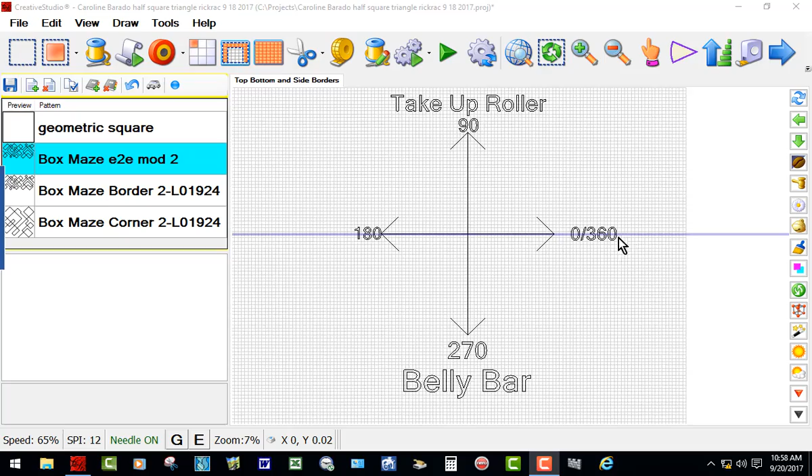Here I have a mock-up of this quilt that I'm going to be working on. This is just my picture of how everything is oriented. And I have my top border, I have my corners, and I have the corner at the bottom, the left, and the right and the left, and side borders are in, the bottom borders in. So this is just my picture of what I want to do.

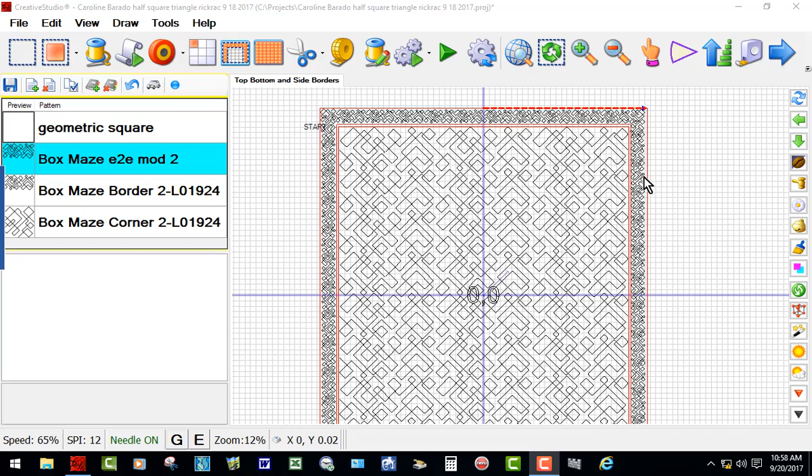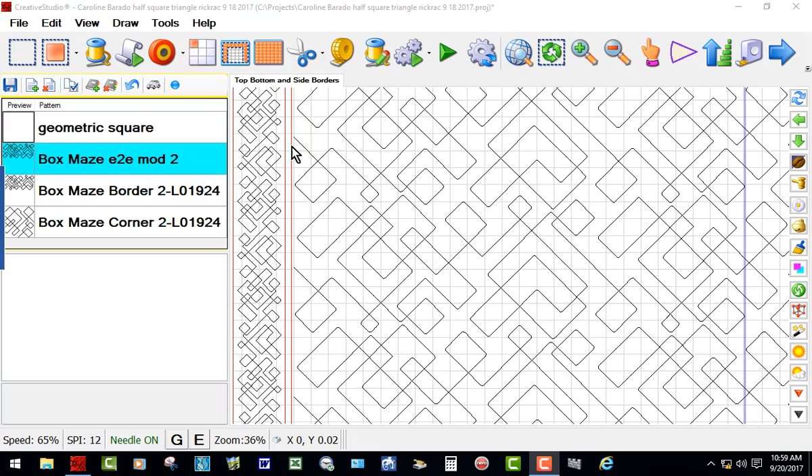And you notice that I have a boundary around the outside. Then I have this little strip. This quilt has rick-rack in this little narrow strip. So I simply put a boundary around the inner edge of the border, and then I placed another boundary around the inner edge of the rick-rack stuff. Then I put the quilt pattern I'm going to use on the interior. I have put that on the screen.

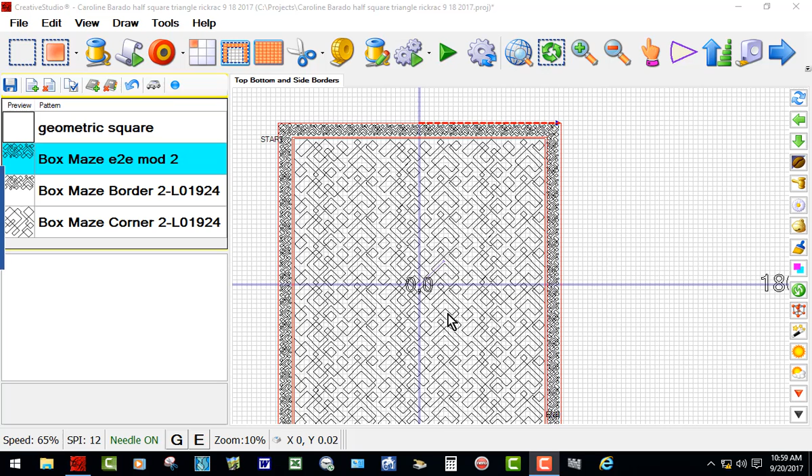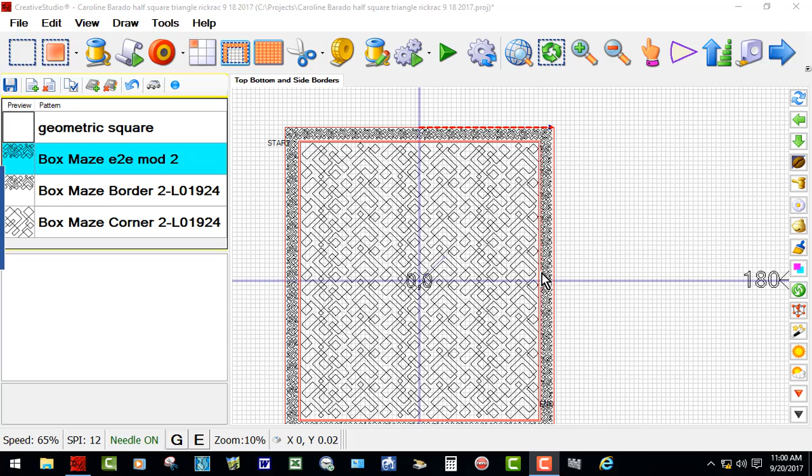Here is my origin, 0, 0. So this is how I'm going to work on setting this up. I think in the next quilt group, I'll show you how I go about orienting all of these patterns. And remember, patterns have to be properly set in place so that they connect correctly, and so that the edge that is on the outside of the boundary is going to be the same orientation all the way around the quilt.

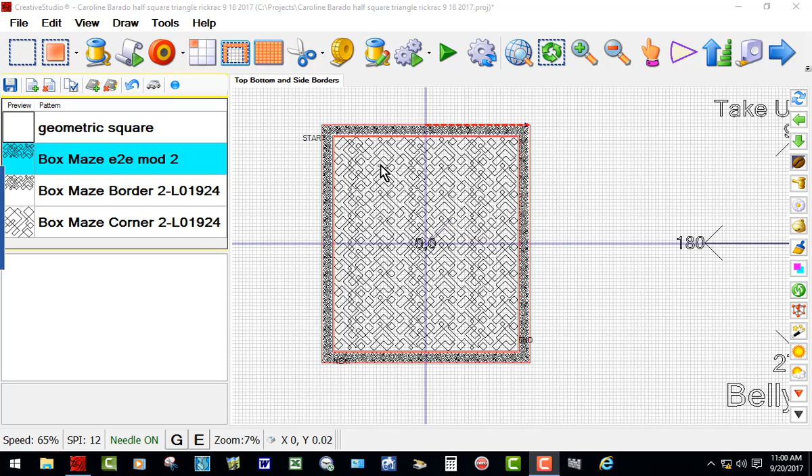The way that this is set up to quilt is left to right, then top to bottom, right to left across the bottom border, and from bottom or belly bar towards the take-up roller. I don't quilt this left side in that direction. I change it so that I can quilt it from the take-up roller down towards the belly bar, but I'll show you that as I do this. But let me show you how I can go about setting this up.

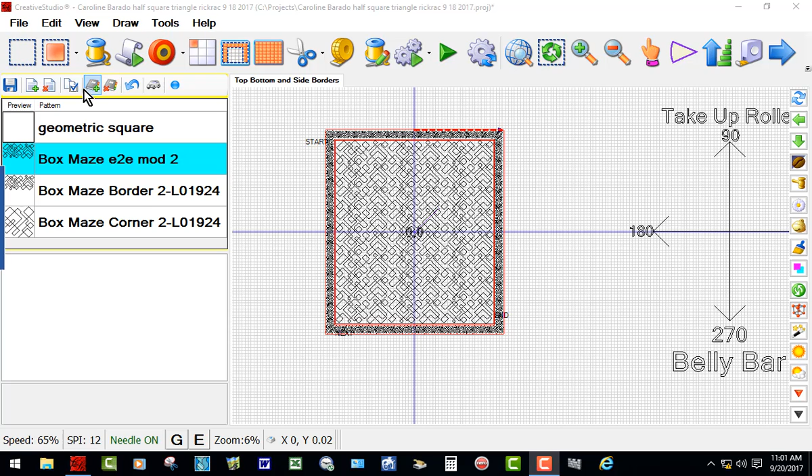You notice over here I have my geometric square. This is my box maze edge to edge. Then I have a border and a corner. So we'll place all of that. I need a new quilt group, and I'll call it borders. So now I have my quilt group.

I'm going to go get my geometric square. I need this geometric square to be 59 by 69. I have freeze aspect turned off. The reason I have it turned off is now I can enter the numbers I want to, and it won't automatically change the dimension. So the width I want to be 59. The height, this is the total height, I want it to be 69.

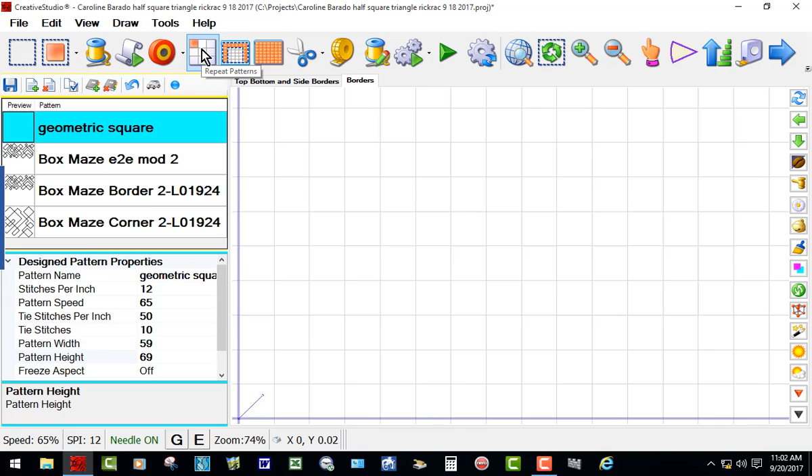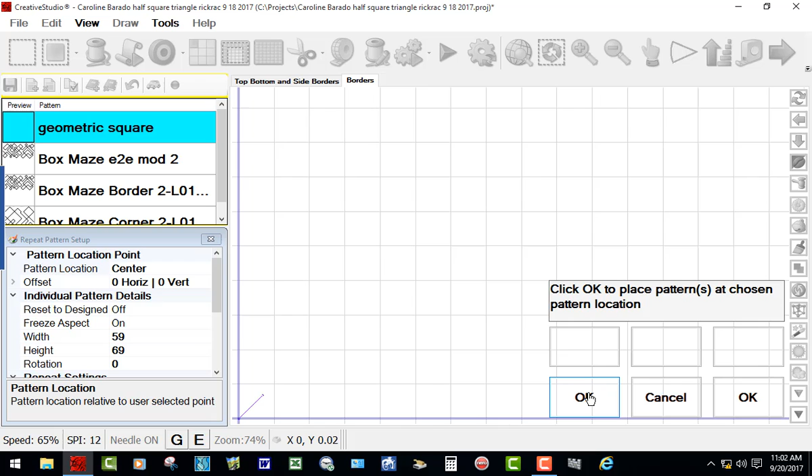Okay, now if I go to repeat patterns and I make sure that I am in the center, because I just want to put this on the screen. 59 by 69, have it center. I'll click OK. It placed that around where the machine is sitting. That's 0, 0. Okay, so I have that one in place. Get out of this, go back to this one.

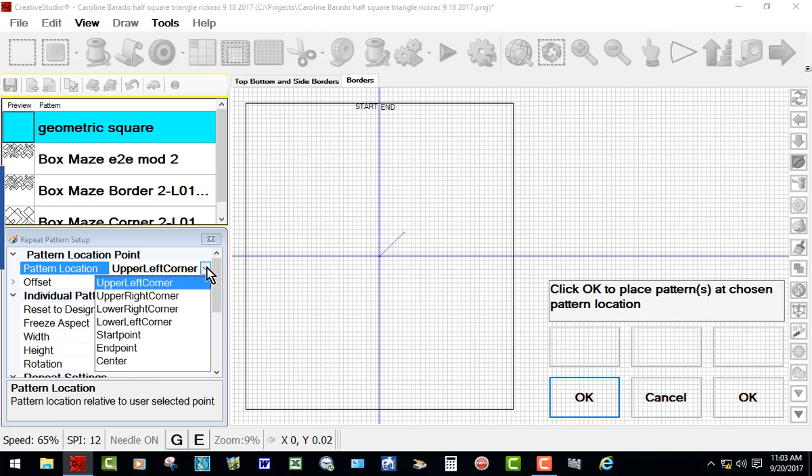This border is 3 inches wide all the way around. So I'm going to subtract 6 inches. 3 inches this side, 3 inches this side. 6 inches. So that makes this 53 and 63. So when I go to repeat patterns, when it's 53 by 63, I make sure my reference point is center. Press OK, puts it in place.

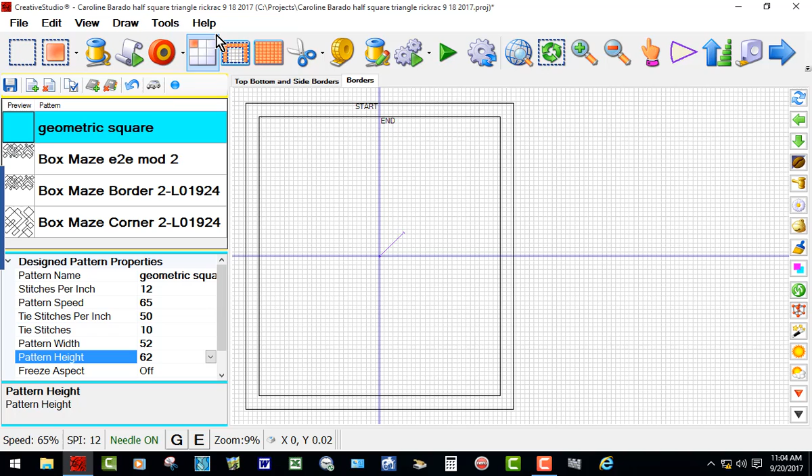Now I need to put that little ½ inch on each side. So I need to subtract an inch from this. So we have 52 and 62. Go to repeat patterns, the reference point center, place that in there. Okay, now I have this in place. That shows me how everything is, and then I could go and put this in if I wanted to.

However, I'm going to select all of these. These are actually patterns, but I want them to be boundaries. So I'll select them, convert.

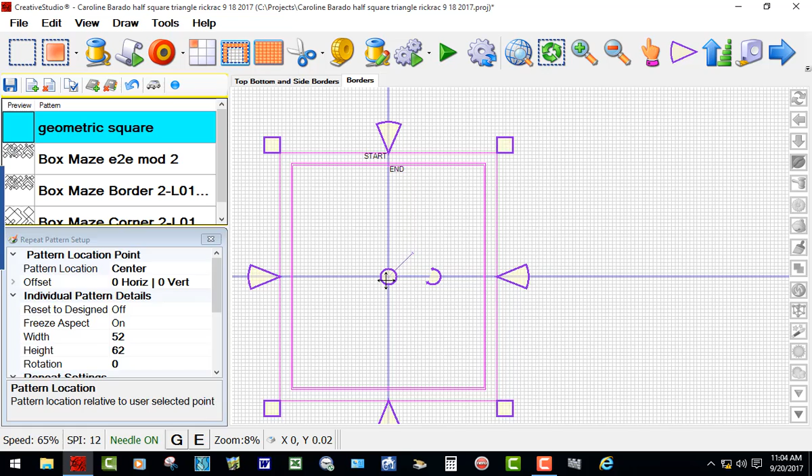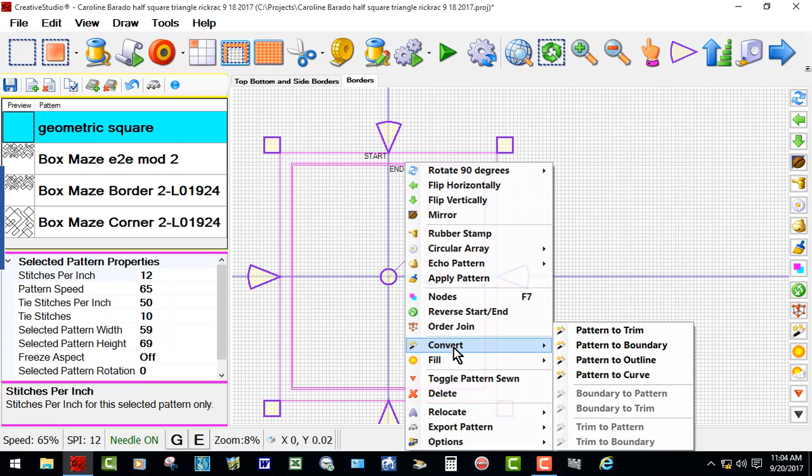Now first I need to combine them. Go down and combine patterns. Now I can select. See, when I go and click anywhere, it selects everything. So now I can go right click, convert pattern to boundary. So there it is. That's all the boundary.

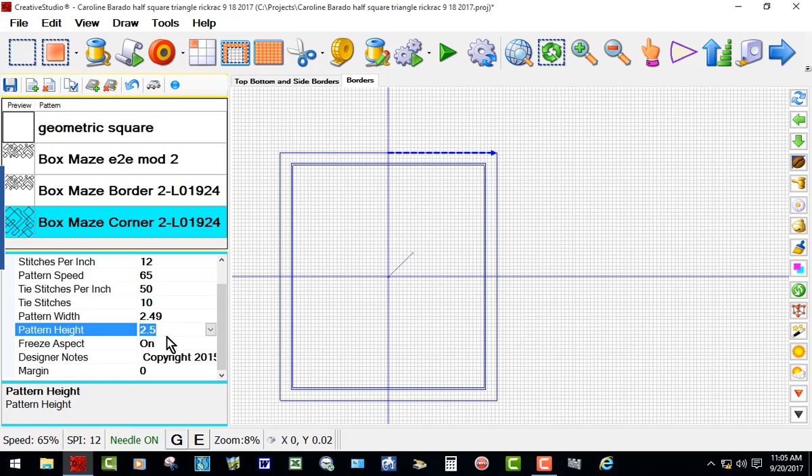Next thing I'm going to do is place my corner patterns. And I have this set at 2.5, but I think I'm going to change it to, I'm going to turn aspect on, leave it on, and have that 2 point. Well, I'll leave it like it is for now. I'll just leave it alone.

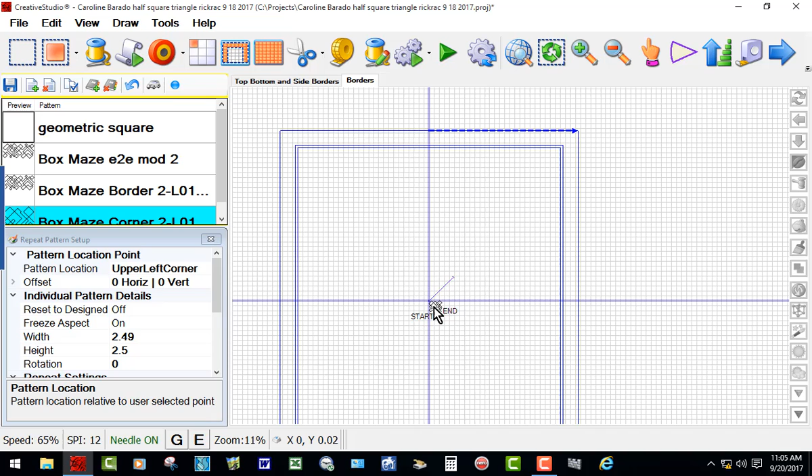So I'll get my corner pattern, go to repeat patterns, and it's upper left, so I'm going to leave it like that because I'm going to have to move it in place anyway. So it's going to do the upper left according to where my machine is sitting, where 0,0 is. Grab this thing, just move it into place, zoom in on it, and change it to the orange.

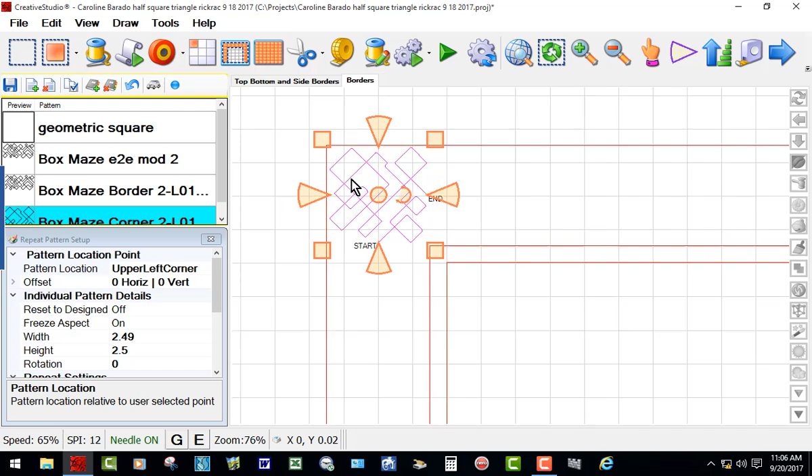Now as I drag this, it's going to get larger around the center. So I'll keep dragging it and sizing it. Okay, that looks pretty good as far as from here to there. All I need to do now is move it into position and change my anchors back. I like to have these blue anchors.

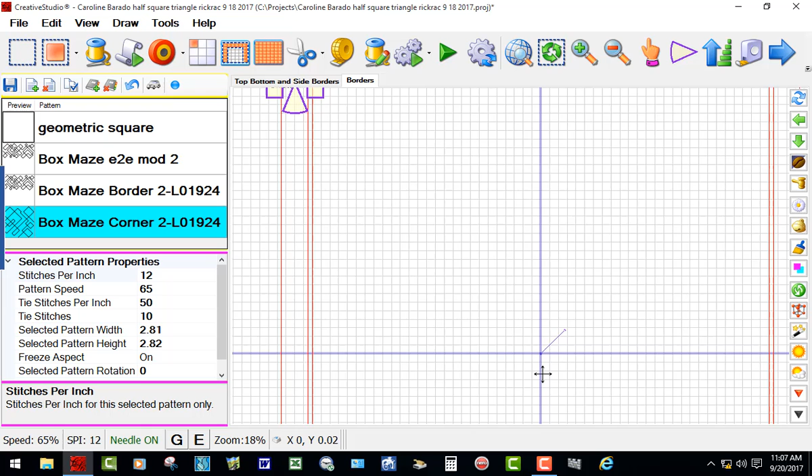I have it selected, right click. I'm going to circular array it. 3 at 90, that's correct. Place the array, click right on this intersection right there, and it's going to put them in place. But here's, you notice, here's something.

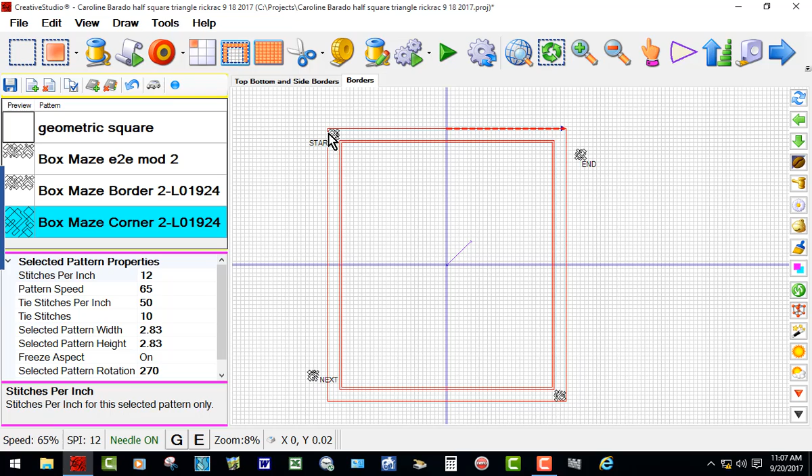This distance here, okay, this distance and this distance is the same, so it puts this pretty close to this center. The reason why I like to use circular array is because it is already sized the way I want it to be.

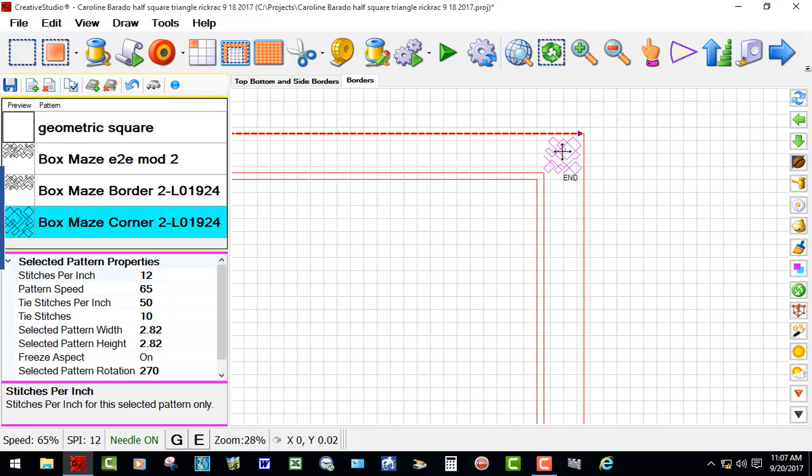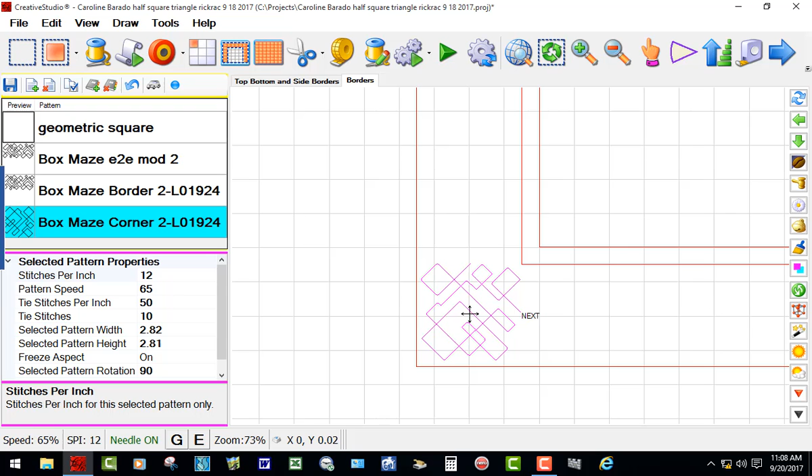Now I'm going to go and get this one. I'll just move it into place, and later on I may have to do some adjustments to this, and that's normal. Get that one in place. Get it where I can see, get it fairly large. Just move it where it looks like it's oriented the way I want it to be. I'll probably have to make some kind of an adjustment to it later. That's okay. So I have all my corners in.

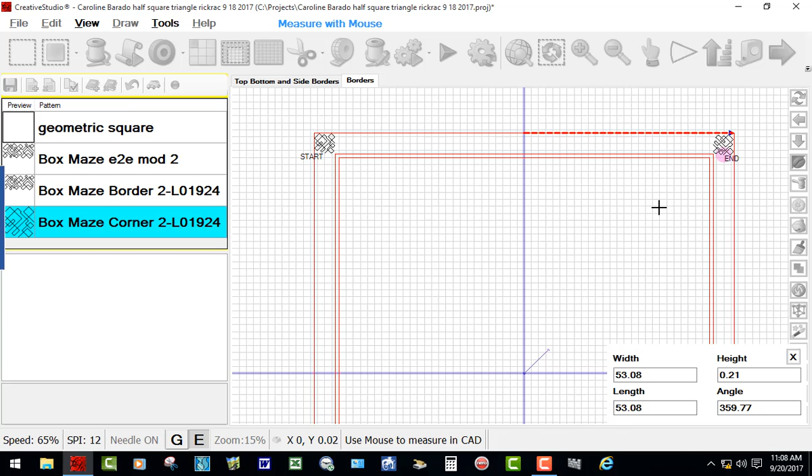Now, my next step will be to place these border patterns all the way around. Okay. First I'm going to place this one at the top. I'm going to go Alt-M so I can measure. Turn on the end snap and click that point, click that point. It says I have 53.08. I'll just right click to get out of that.

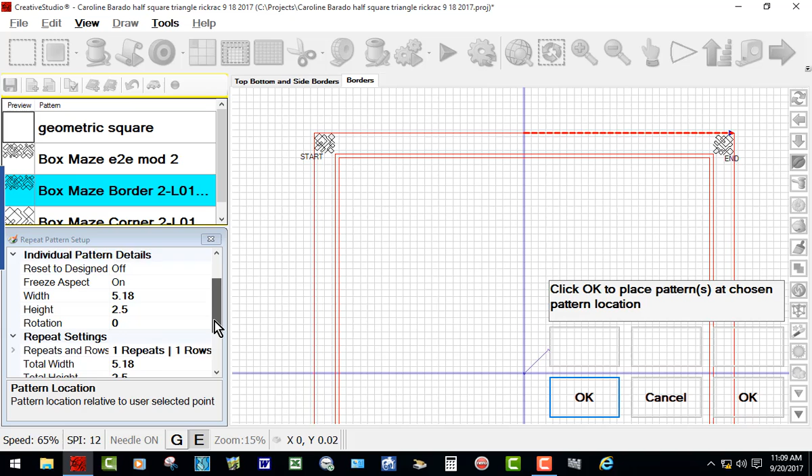I'm going to get my border pattern and go to repeat patterns. I want my total width to be what the measurement was, 53.08. Okay. Click OK. That puts that on the screen. I'll move it over,

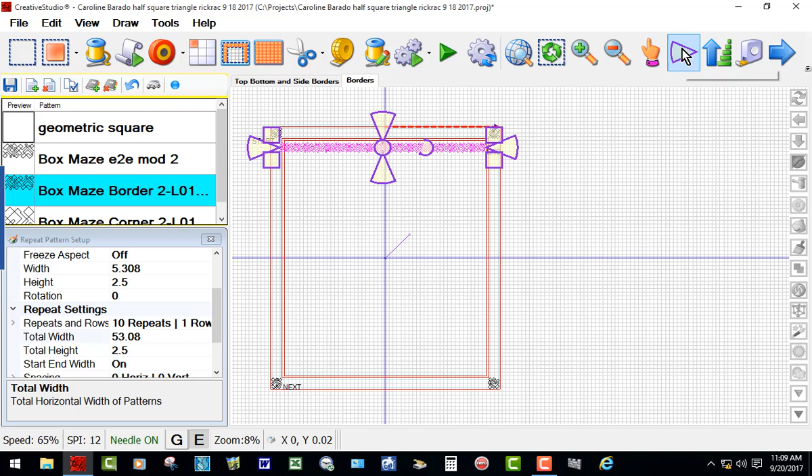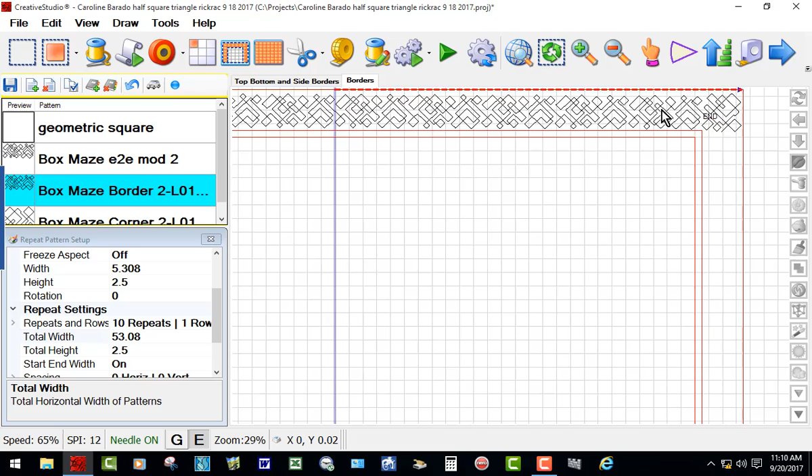and it doesn't matter how close I try to get this. I'm just going to go get my end anchors. I have end snap turned on. I'll move this up, snap it in place, move this up, snap it in place. Now that's pretty good for the time being. I need maybe to have this a little bit further up here, which means I'm going to have to move this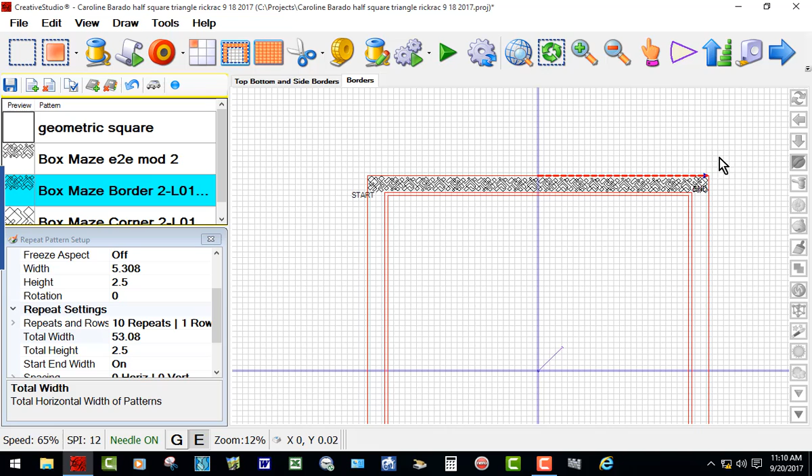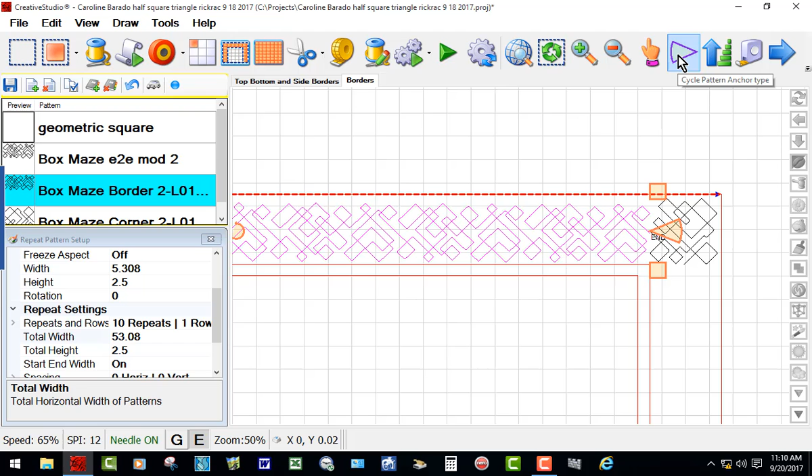and I will select all of these patterns in the border. Now notice I didn't select the left corner or the right corner, so I can just select those patterns in the border. Get my end anchor. Again, I'll move this. End snap is on, and I'll do some more adjustments to this as I quilt this. So that's in. Escape, we get out of this.

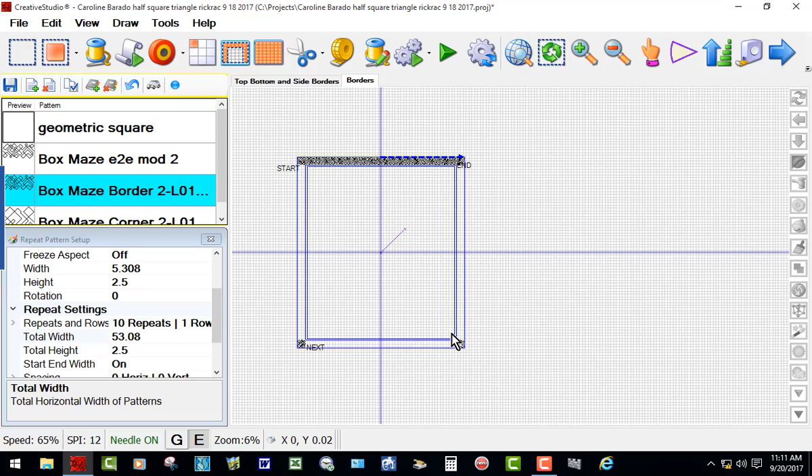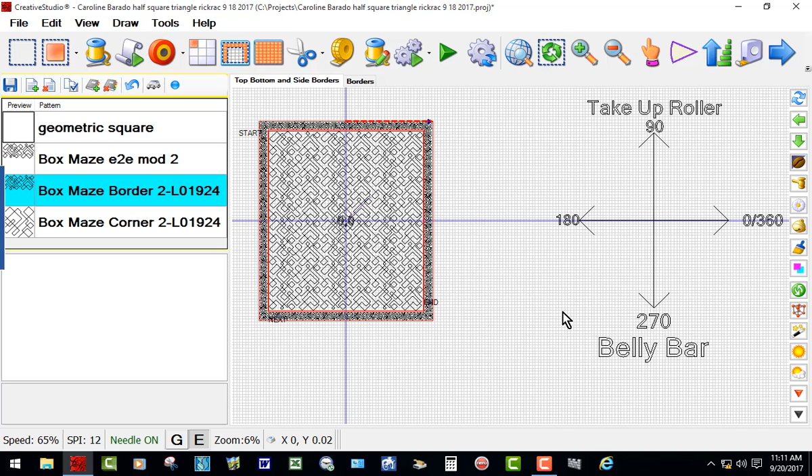I need to go down the side, and matter of fact, I'm going to put in this bottom one next, since I have my side border selected. Now remember back over here, this direction is 180, so this has to quilt this way towards 0, this way towards 270, this way towards 180, and this way towards 90. Okay.

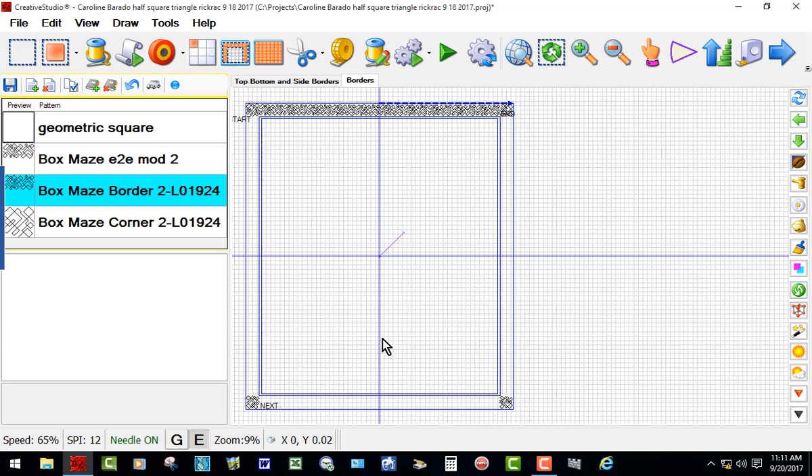To make it make sense, I'll just go ahead and put in this side border, and that'll give you an idea of how all this is accomplished.

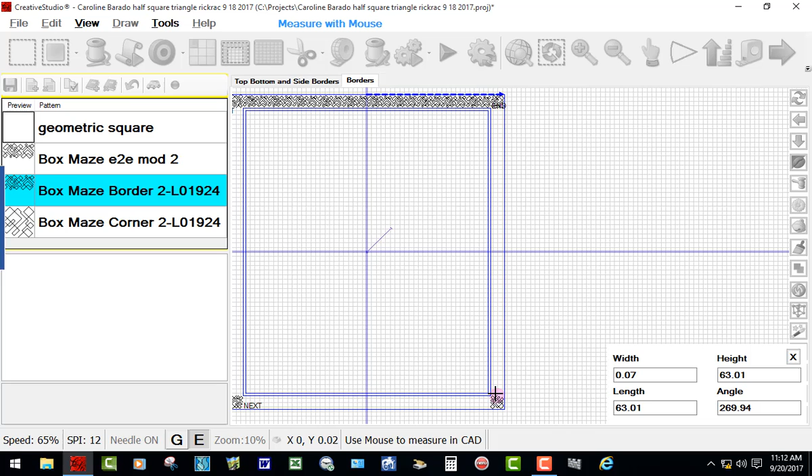I need to measure, Alt-M, from the end of that to that point. 63.01. Okay, go to repeat patterns and put in my right here, 63.01. My angle is going to be 270, remember?

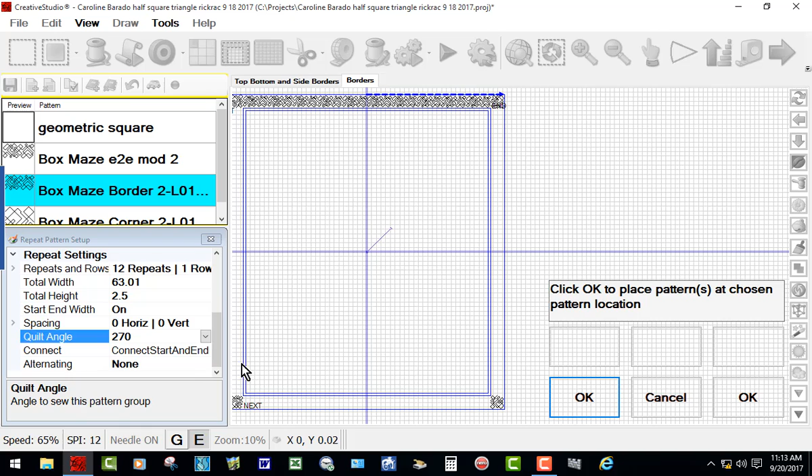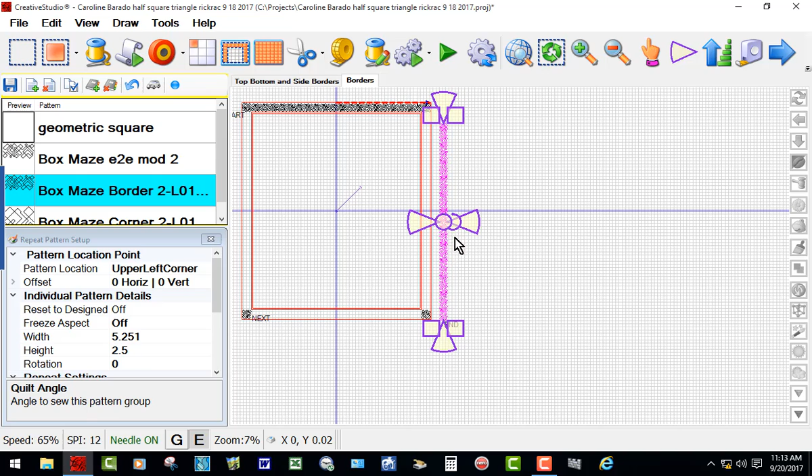Okay, 270. I think I'm going to just leave my reference point upper left corner. I'll click OK. It's going to put all of those right there. I'm going to select all of them, move them over, and get my end anchor. Okay, grab that. Okay, those are in.

Next, I need to put this in. And I want it to go, this time the angle is going to be 180. Remember this was 270. This is going to be 180. So I'll just put all these in, and then I'll put this one in last.

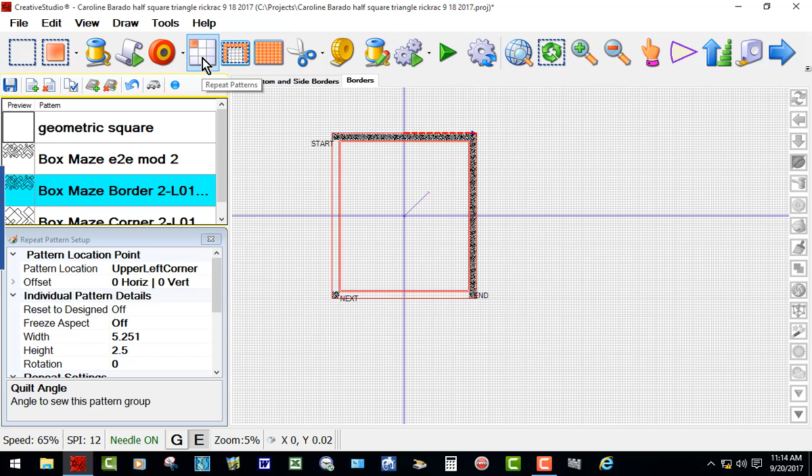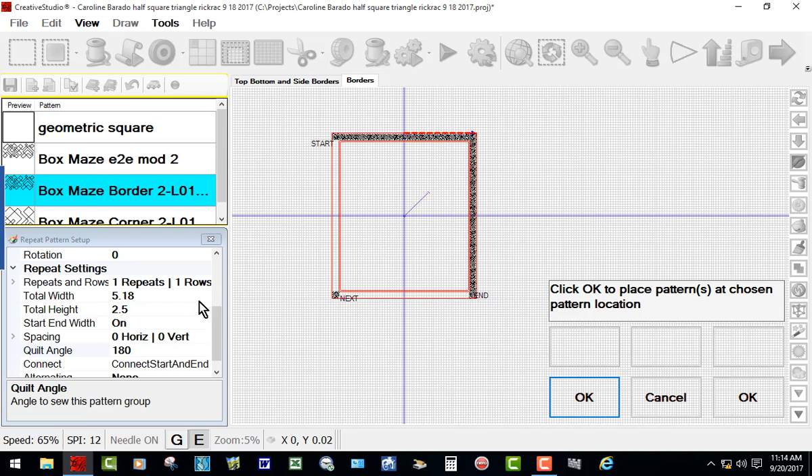I have my border pattern. I'm going to go to repeat patterns. There, my angle is 180. Press OK. I'll just go ahead and leave this as upper left corner for this demo. Oops, got a problem. Okay, forgot to do a couple of things.

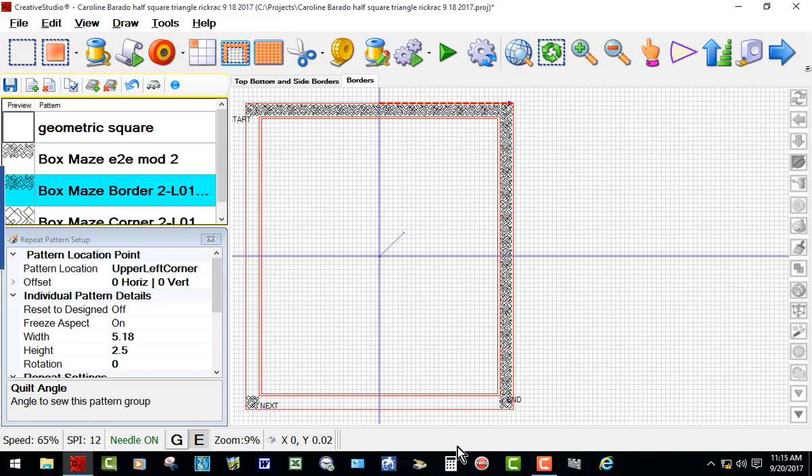I need to measure this, and I'm going to measure from this point right there to that point. 52.97. Okay, 52.97. Go to repeat patterns. Okay, go down here.

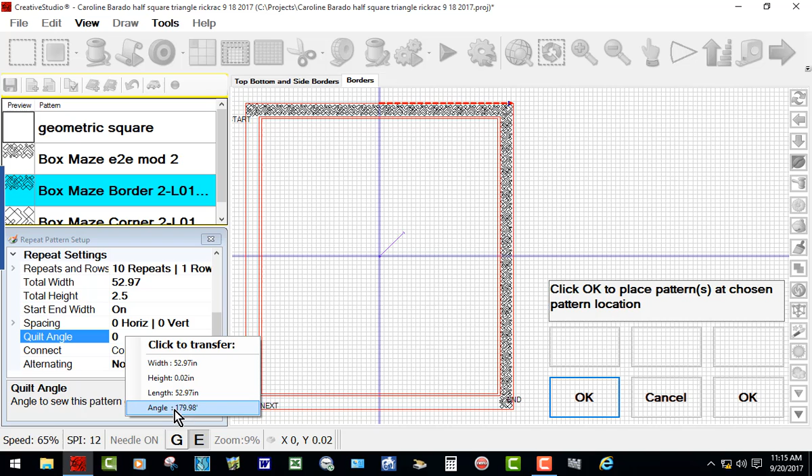Now remember, when I measured from left to right, or from right to left rather, this gave me the angle. All I have to do now is select that. See, it put the angle in there for me. Click OK. Bring it down there. Connect it.

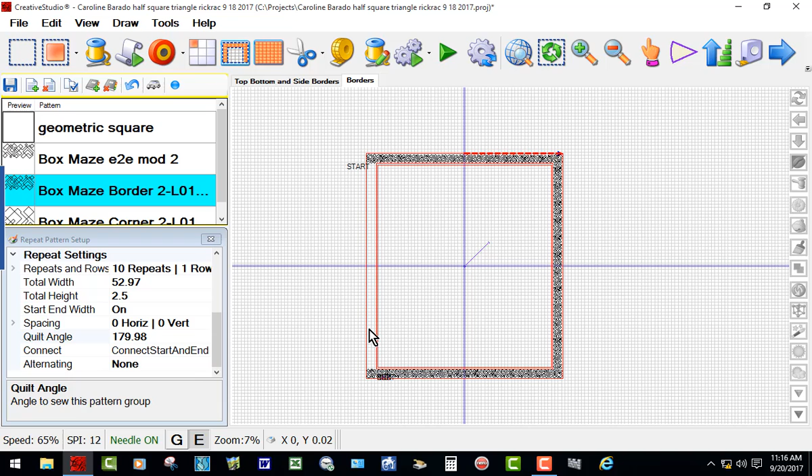Next, I need to put in all of this over here. Now I'm going to put the patterns on the screen for this. Remember, I've set this up so that the orientation is correct, going this way to the right, top to bottom, right to left. Now I want the orientation to go correctly from bottom back towards the top. I have my border selected.

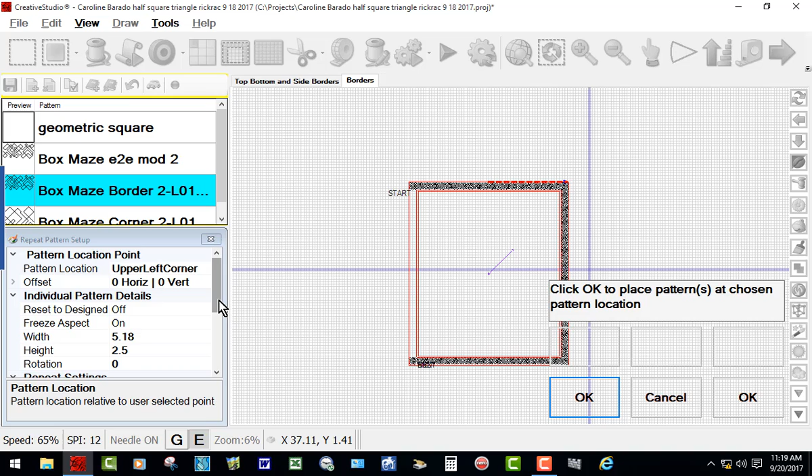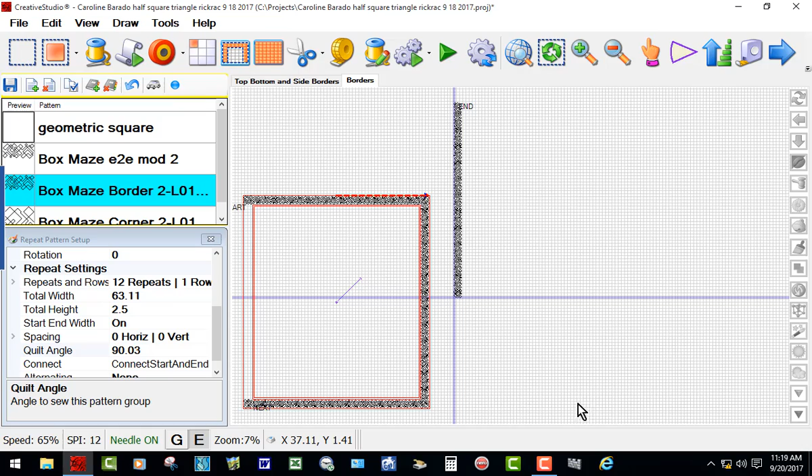I will simply do another measurement. Notice I'm measuring from the bottom up towards the top. Go to repeat patterns. Total width, just right click, put in the width, the angle, I'll right click and it gives me the angle.

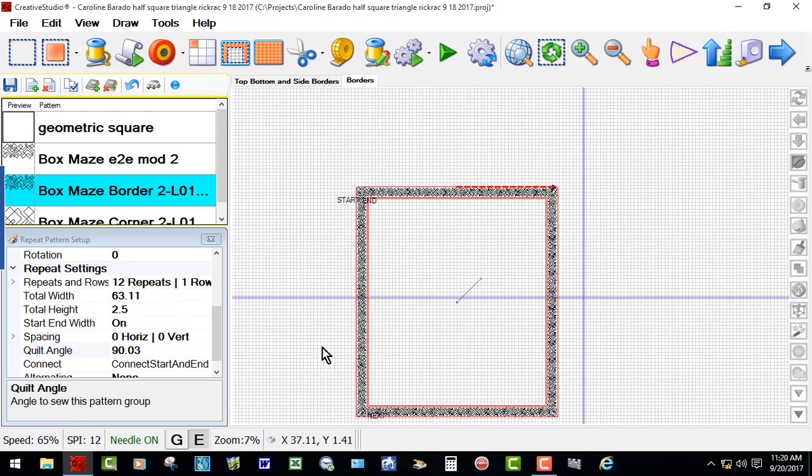There it is. I'm just going to select all of this, get my side anchors, move it over here close, get the end anchors. Okay, I now have all of my patterns into place, and I will show you exactly how I intend to quilt all of this.

Okay, what you have to remember is now this is all perfect because I used a square that's perfect to set all of these borders in. That's not how your quilt's going to be. So what I want to do is delete this, and I'm going to draw my own boundary.

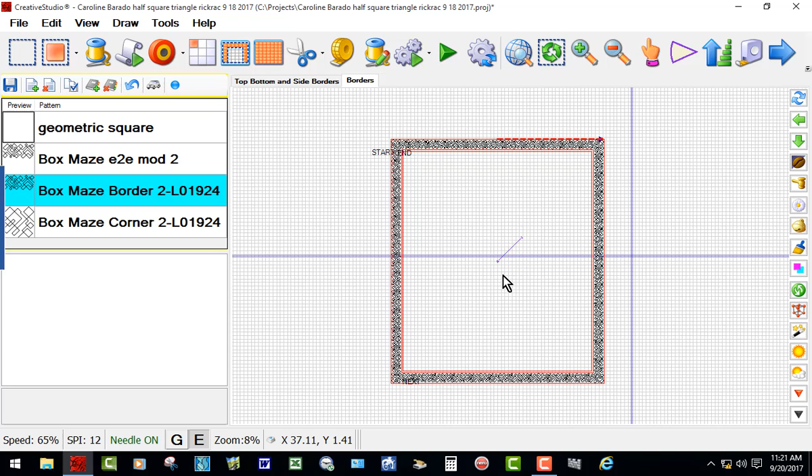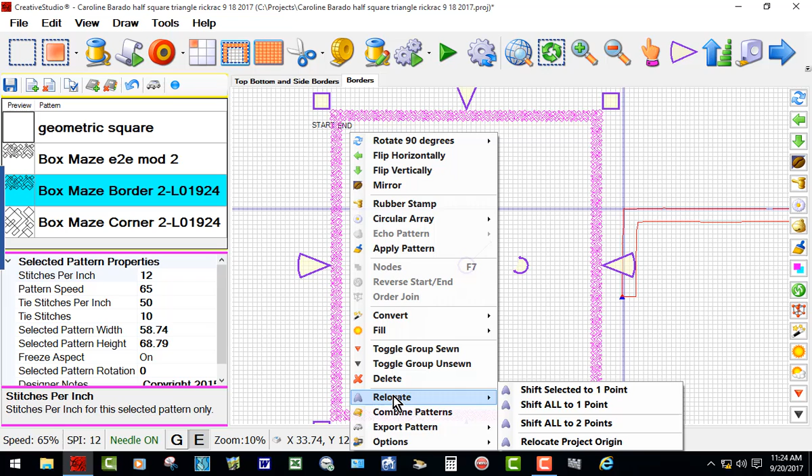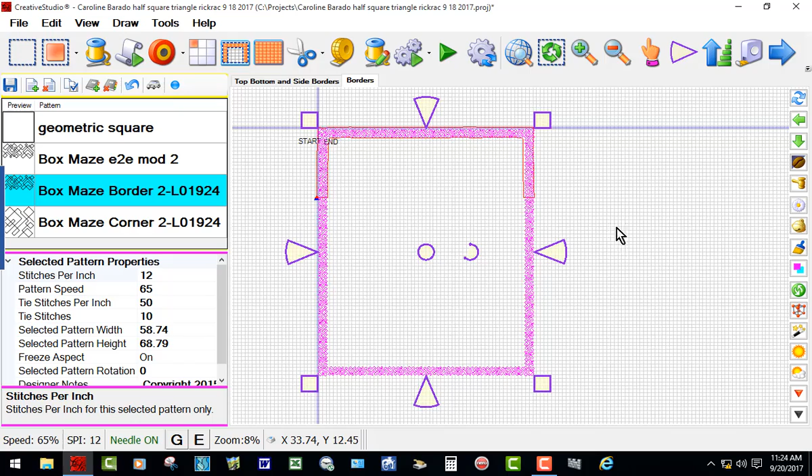Okay, you say, well, you drew your boundary, but now everything is really out of whack. What are you going to do? I have the machine sitting in the upper left corner of the actual quilt, and what I need to do is right click somewhere and relocate, shift all to one point. I'm going to turn off this end anchor, and I'm going to simply click this corner right there. Okay, I click that corner. Now it's put the patterns relatively in the proper place, the proper orientation.

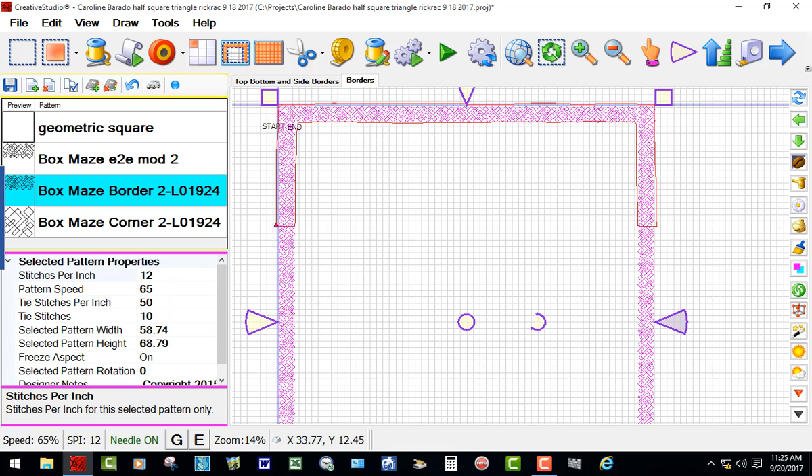But you see how everything is right here. It's kind of a little bit, it's not bad on this side, but over here it's not exactly lined up the way it needs to be. So I guess I can simply, this side anchor will stay placed. I can use this wedge and just move everything over like this. And I'll have to fine-tune that before I quilt.

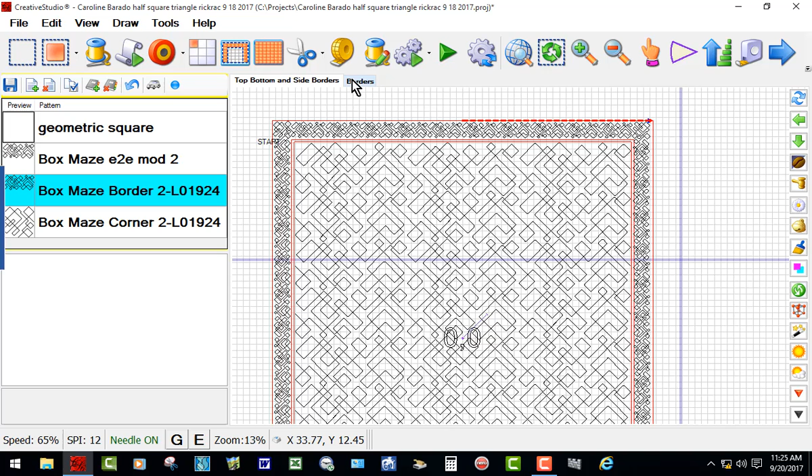Now this is reality. This is what I call make-believe, because I set everything up perfect using the geometric square. But then when you get to your quilt and get to reality, you find that things are different. Okay, that's reality. So I'm going to tell you one other thing.